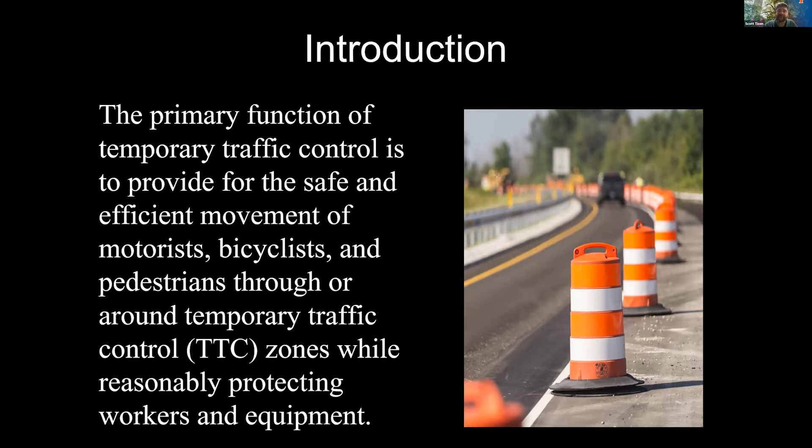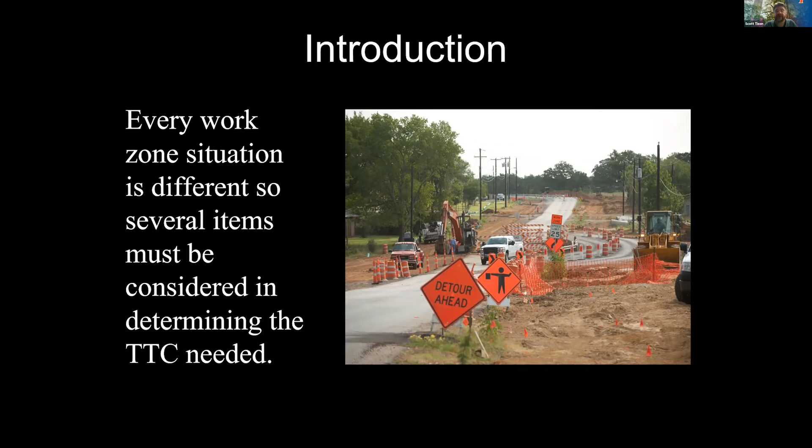I'm going to tell you right now, we don't have time to cover every possible thing. Although the Kentucky LTAP does a wonderful job in work zone training, they can certainly give you much more than I can in the next 45 to 50 minutes. But every work zone is going to be different. You're never going to have the same issue all the time. So there's different types of things that you need to be thinking about when you're putting together your work zone traffic control plan. For example, is this going to be a long-term project?

Are we going to be stationary? In other words, are we going to be sitting in one place? The definition that we use in Kentucky is work that occupies a location more than 3 days - that's considered to be long-term. Is it going to take that long? Is it going to be less?

For example, could it be an intermediate term stationary operation? That means work occupies a location for more than 1 daylight period, but up to and no more than 3 days. Or maybe it's nighttime work and it lasts more than 1 hour. That is considered to be intermediate in terms of our time duration for our work.

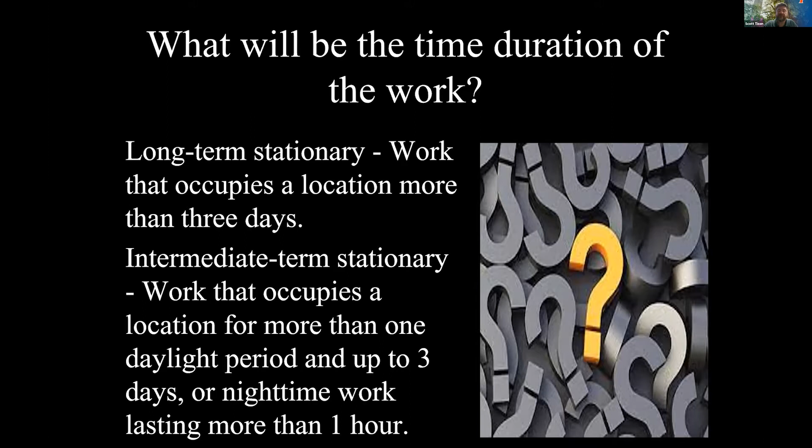Maybe the project is pretty quick - it's a short-term duration, daytime work. It occupies a location for more than 1 hour within a single daylight period. We'll be done by the end of the day. That could be a project that we may have to do, and there may be additional considerations for that.

Or short duration - in other words, we're not going to be out there super long at all. Maybe we're just throwing some rock down, maybe we're just patching potholes, but it's going to be work that occupies a specific location for no more than 1 hour at a time.

We may also have mobile operations where we're intermittently moving - we're stopping every once in a while, but not for a long period of time, and then continuing on. Or it may be a mobile operation where we're constantly moving. So all of these questions are factored into what kind of work is it we're going to do and what are our challenges.

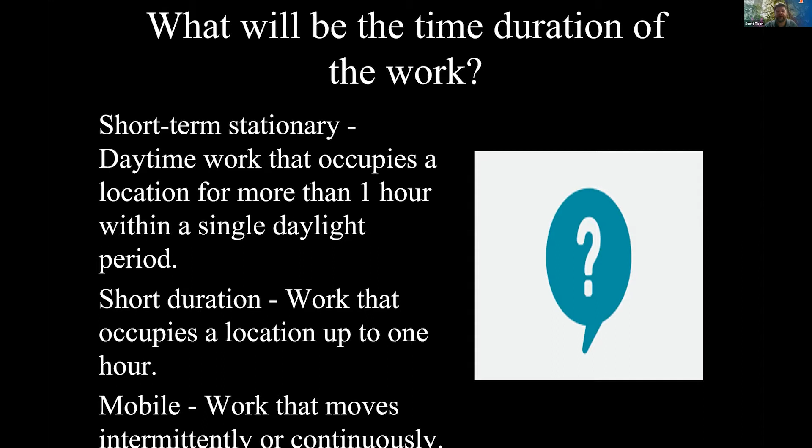For example, where are we working? Where's the work zone going to be? Is it on the road? Is it on the shoulder?

Is it off the roadway? Are we talking about working for sidewalk facilities? Are we going to have to channel those pedestrians and bicyclists to a different area? Is a detour going to be involved? Are we working near an intersection?

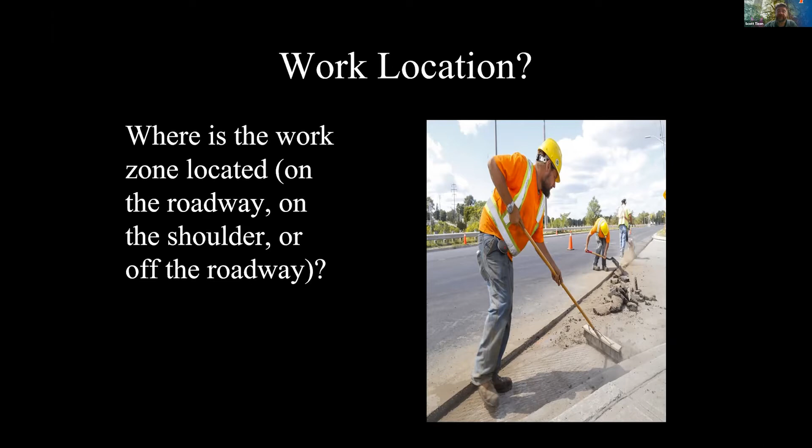All of those are important questions we have to ask ourselves when we're laying out how our work zone is going to be prepared. Other things I want you to think about: what kind of road are we really talking about? Is it a city street? Is it a high volume road? Maybe it's a rural road, low volume, no more than a couple cars every 5 minutes.

There's not a lot of vehicles out there. Maybe some farming equipment every once in a while. That may affect how we do our setup. The other question I would ask is, how fast is the traffic actually going? You all can feel free to place this in chat, but if you're in an area that has a 45-mile-an-hour roadway, what are people really driving on those roads? It's a 45-mile-an-hour road. What are they really driving where you live and where you work?

But it's a critical component. How fast is traffic really going? Do we know? Do we have any information? Have we done our research?

I know that we have some chats coming in here. If it's 45, people are saying it could be 55 to 60, 55. Seems to be a pretty consistent answer. So we know that our motorists, unfortunately, are probably driving faster than the speed limit that's posted. And so we take that into account as well.

And then we have to ask ourselves, how much traffic are we dealing with? For example, what time of day is it? Is it in the morning time when there's either the school rush or people trying to get to work? It's going to be a heavily trafficked area, and that's going to put a lot of pressure on us. It's going to cause a lot of hurt feelings on the part of the motorists.

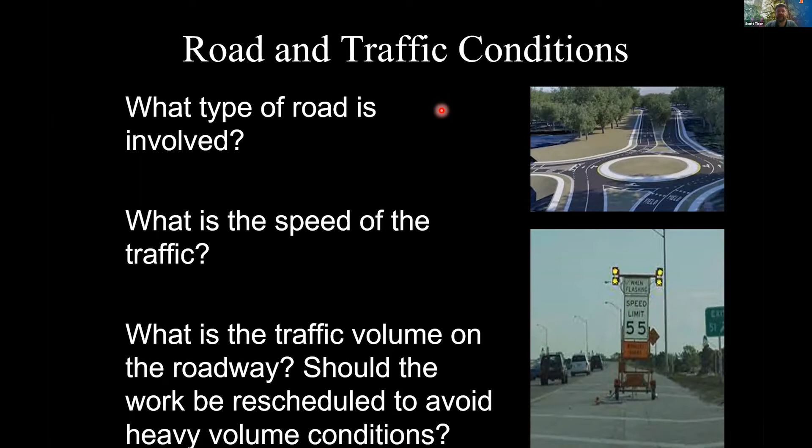Is there a home football game in our city that's got a lot of people coming in from out of town? We can't be tying up the roads that way. So all of those are road and traffic conditions that I want you to consider when you're planning out your work zone.

How about this? Will the nature of the traffic change once the work is underway? Will it affect our work? If it does, then we need to take that into consideration beforehand.

Do you have a good relationship with your law enforcement, your local law enforcement agency? If so, that's wonderful, and this is really going to be helpful to you. Will local law enforcement be notified? Perhaps we need their assistance in slowing people down. A little blue light never hurt anyone. A little slowing people down, that's not a bad thing.

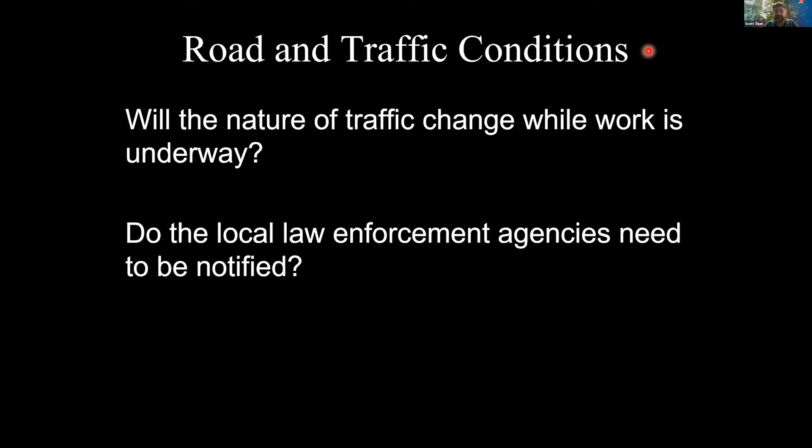That's a good thing. But what about emergency workers, emergency responders? If we're going to be taking up roads, do they need to know ahead of time? I think they do. Perhaps they can reroute themselves a little bit. We don't want emergency vehicles coming through while we're in the middle of a flagging operation, where we've stopped everybody on each side. We need to let those emergency crews work their way through. So we need to be sensitive and concerned about the needs of law enforcement and emergency personnel in what we do.

Now, just to give you an idea of what we're talking about in terms of temporary traffic control signage, we need to determine what kind of signs are going to be required. We'll look at that as we go through it here this morning, but you want to ask yourself: is this a flagging operation? Are we losing a lane? Are we merging people, or just shifting people around? Is it a shoulder that we're working on?

Depending on the kind of work we're doing is going to determine the type of sign and the sequence that we have to have. Some sequences only have a couple of signs. Some sequences have many more.

So we need to determine what sign we need by the kind of operation it is. And then the next question is, what are you actually going to put out there? Once you see the signs and you know there's something coming, what are we going to do to channel the motor public? We'll hear the term used: channelization, channelizing devices. What that simply means is we've got to point and direct the motoring public, the pedestrian public, or the bicycling public where it is we want them to go.

We want to delineate that. And the best way to do that is to point them, to show them, to make it simple on them so they don't have to worry and be confused about what we're trying to tell them. So you would ask yourself this question: which of these devices works best for our road users in the area that we work and we live?

Would it be cones? Maybe drums. Maybe they're a larger target. They give a good value - in other words, people see those things and they really don't want to run into them. They look very formidable. Now, in reality, these things break away. They snap there at the bottom.

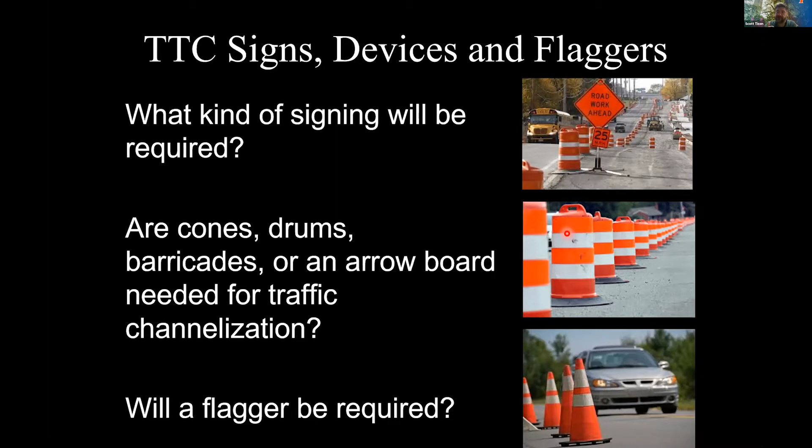And then lastly here on the slide, do we need a flagger? Is it a two-lane, two-way road? Is it a flagging operation? If so, we need to have flaggers on both ends. We need flaggers that are trained, certified, qualified to do the work. They've gone through the course, they have a certification card. If they are required, that's going to change some of the signs that we're going to use. It's going to change how we lay out our tapers, which we're going to talk about here in just a little bit. So some of the questions that I want you to consider as we're going through this presentation.

Now, we're going to go through the 4 parts of a work zone because there are 4 parts to a work zone. And the first area that you come to is the advanced warning area, and it does exactly what it sounds like. It gives advanced warning to the motoring public that something very soon is going to be encountered by them. It's something they're probably not expecting and something they're not used to. And so we calculate the advanced warning area from the very first sign that you will come to, to the beginning of that transition area, or what we would call the taper.

That's going to tell us what is our distance for the advanced warning signs. How far apart should those signs be? Well, we have a chart that we're going to give you here in just a few minutes. But you're going to start out very simple and very basic - for example, road work ahead, very generic, very simple. Could be utility work if you're doing a utility project.

The important part is that you are giving motorists enough time to recognize there is an issue. Now, let's use a 3-sign sequence for a moment. I realize every setup doesn't have only 3 signs, some more, some less, but let's talk about a 3-sign sequence.

That first sign in the advanced warning area is really, I won't yell at you, but it's as if that first sign is yelling, hey, wake up, pay attention, we're out here. That's what that first sign does. It lets people know something's fixing to happen, something different that I'm not used to.

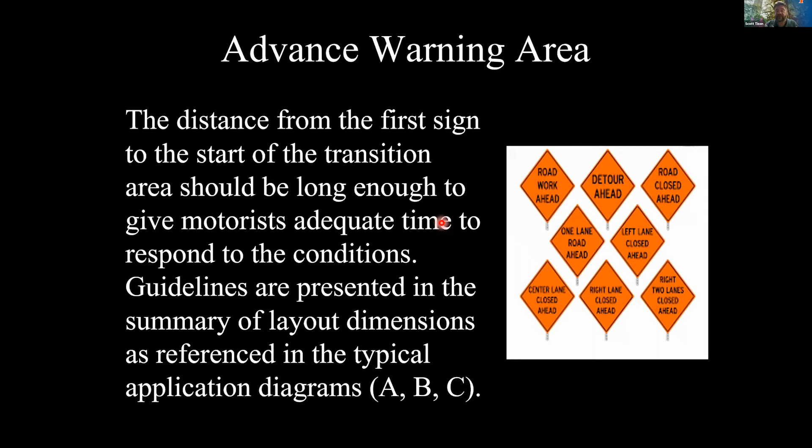It serves as the initial warning that something is taking place on this roadway that is out of the normal realm of experience. And remember, we're always dealing with the sum of drivers' experiences.

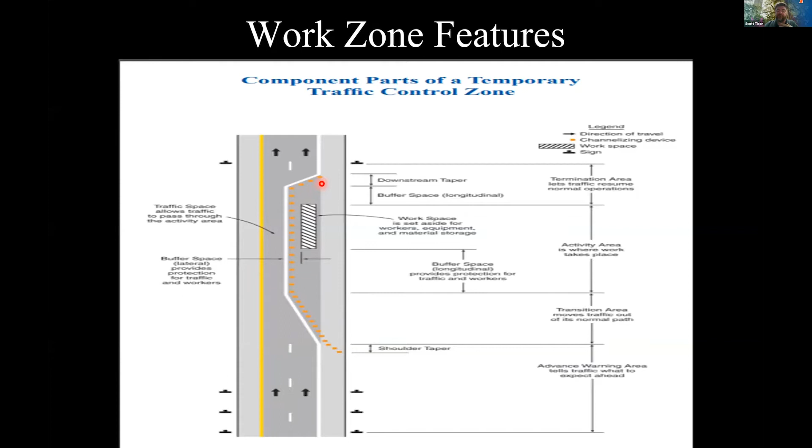In terms of a work area, there are 4 parts to it. You have your advanced warning area, used by these 3 little symbols, just showing 3 signs, could be more, could be less, but that's our advanced warning area. We'll talk about our transition area, which is this taper area right here. We have our activity area, which encompasses the buffer space, the workspace, and the traffic space. Then we have what's called the termination area, where we have a downstream taper where people are alerted it's okay to go ahead and get back into your lane.

Now, let's talk about some of the signs you're liable to see out in the field. Some of these are work zone signs, some are signs that are already there. For example, it's not uncommon to see a yellow or amber colored sign. That color is specifically a warning. It lets you know, under normal circumstances, that there is a condition located at that roadway that is constantly in place. For example, we have a lane merging here into this lane. That's not going to change unless we shut down that lane or take it away. This sign is going to be there in perpetuity until we change the design of the road.

So that's a sign that even if we had a work zone set up, it would probably stay there. Here we have a stop condition up ahead. It is a warning that there is a stop condition, it doesn't impose legal liability on us. It just tells us you're going to get to a spot where legal liability can be imposed. That's what a warning sign does.

We have regulatory signs. Now, they're not all this shape and not all this color, but the majority of them are going to have a white background with black lettering on them. These are the signs that get us in trouble as road users, the ones that impose legal liability on us. For example, if I don't stop for pedestrians in a crosswalk, I have opened myself up to a civil penalty. I can be cited.

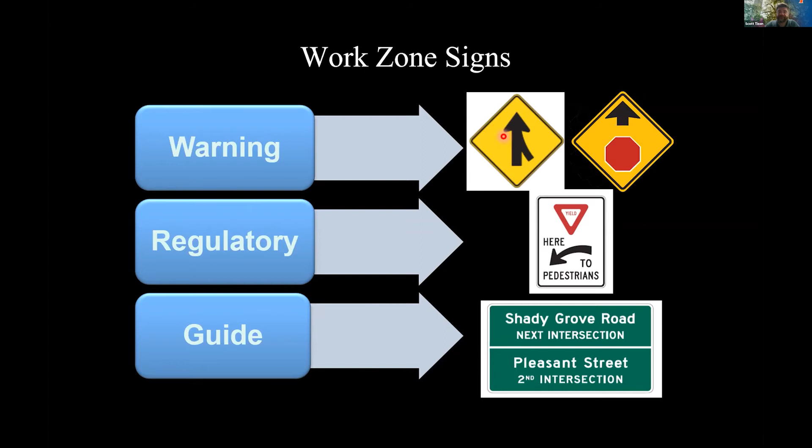For our work zone signs, we want to be careful that we use the correct sign supports, ones that are breakaway — we call them crash worthy. They have to yield when they're hit. They're going to damage our vehicles, but it should not cause a fatality for the motorist who impacts them. For example, you have a U-channel post driven into the ground right here. It's going to break away, snapping at the base just above ground level. It's going to give when it gets hit. It's meant to break away. It's built to handle that.

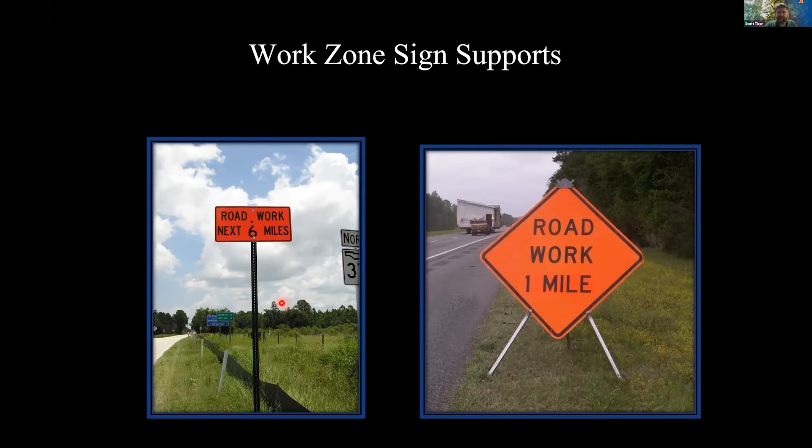Or we may have sign supports that are for long-term work. Typically these are for longer period jobs where we're going to be out there weeks on end. For our more temporary jobs, we just put them on different types of sign supports because we're not going to be out there as long. We don't need a more permanent sign for the time that we're out there.

And for some of you, you may never have seen anything like this, and that's really good — I'm very happy to hear that. But one of the challenges we face, whether you're with Public Works, with the state or local agency, or a contractor, is figuring out where to put these signs on some of the roadways we have to deal with. I want to go ahead and read some responses here as they come.

We have one individual, Eamon, and we said this creates a really big problem for ADA access. I'm really glad you brought that up because that's exactly where we were going to go. Jason says it happens all the time, obstruction of the pedestrian access route. That's a really great point.

So let's talk about ADA for a minute because it absolutely affects what we do in the work zone. Everything we put out there, our signs, or if we're shutting down a sidewalk, we have to make sure we are ADA compliant. That stands for the Americans with Disabilities Act. It was signed into law by President Bush in the early 90s, and then just kind of sat on the shelf. Around 2011, 2012, President Obama reauthorized the Americans with Disabilities Act and ordered the Justice Department to enforce it, and they've been enforcing it ever since.

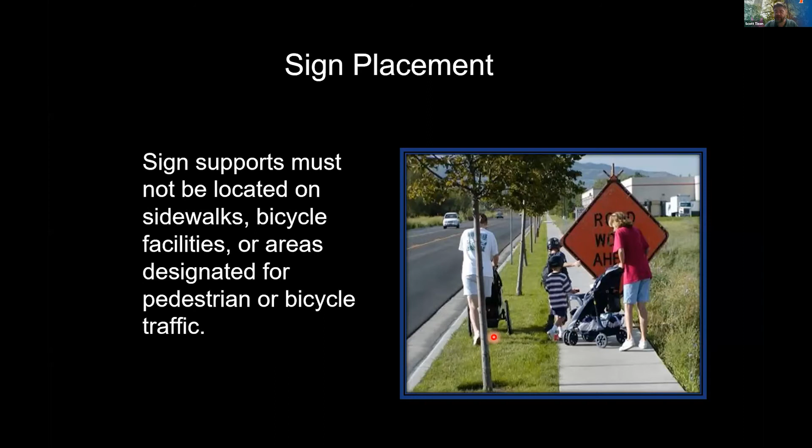Now that's if it's straight and flat, with no obstructions around it. Portable changeable message signs are usually able to be read and understood at about a half a mile, that's typically where those will be found.

We mentioned guide signs just a little bit earlier, but there's some additional stuff I want to share with you on that. They are rectangular. Obviously, they are green, and that is by design from the MUTCD. It's got the green background with white lettering on it.

But there may be some other guide signs that actually show up in our work zone, but they're not green because it's a temporary traffic control situation. We're going to have an orange background with black letters on it. It's still going to give guidance to our motorists. For example, here's one: road construction, that's 13 miles.

That's giving us guidance. But I'm thinking, is there another type of guidance sign that we put in our work zone? It's not going to be diamond shaped, it's going to be rectangular as well. Anybody have any idea what sign that might be? Typically it occurs near or at the end.

Yep, you're absolutely right, end construction or end road work. That would be in what we call our termination area, where the work zone is ending and motorists are free to get back into their travel lane. So those could be considered guidance signs. They're letting us know, okay, you're now away from where all the pressure is. Go on with your life, go have a great rest of your day.

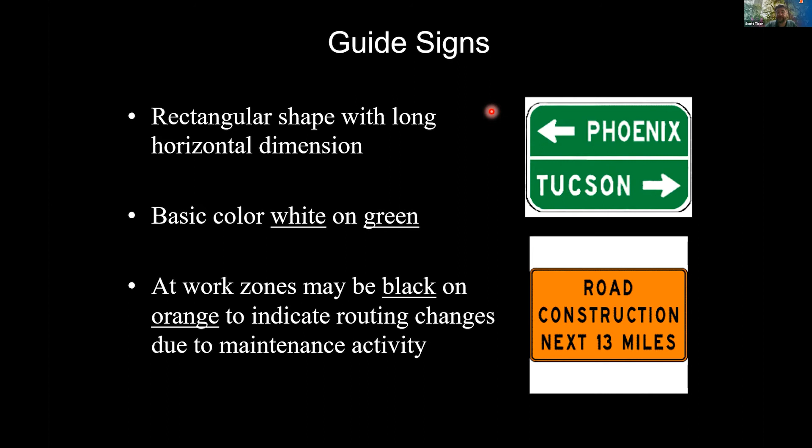One of the other things we talked about earlier were regulatory signs. I want to do a little bit more here. I said generally they're going to be rectangular, white background, black letters. That's true, but I just want to remind you, these are where our legal liability comes in. It could be a do not pass, could be right turn only, or right lane must turn right. Those are regulatory signs, but they're not the only kind.

And we know this one, and we've known it since we were kids - that's the stop sign. But I will tell you this: traffic control has come a long way, because for years the stop sign was not red. Does anybody want to take a guess what our stop sign colors used to be in the United States? What color background, what color lettering? Because it was not red.

R. Williams coming strong said, 'Oh, it's yellow.' You're 100% correct, the stop sign used to be yellow. And the reason it was yellow is because it was a warning. It's as if you were saying: warning, there is a stop condition up ahead. Well, that doesn't have any teeth to it. Oh, warning, there's a train track up ahead - that's good, but it doesn't really have teeth to it. And so what began to occur to transportation officials around the country is nobody's stopping for our yellow signs. Maybe we need to pick a different color.

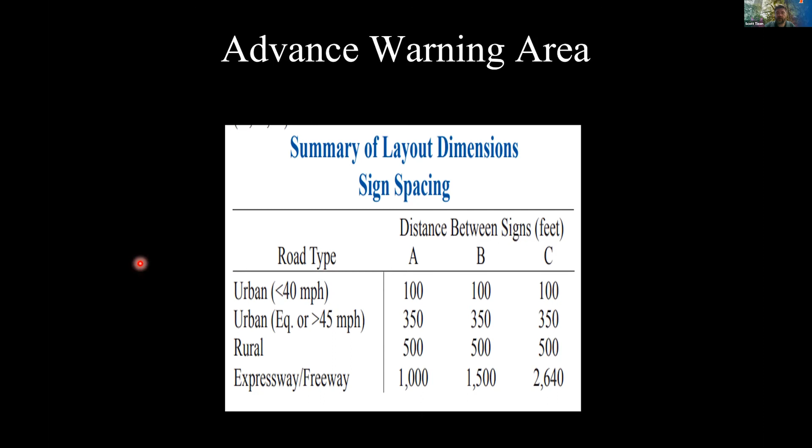All right, we talked about signs.

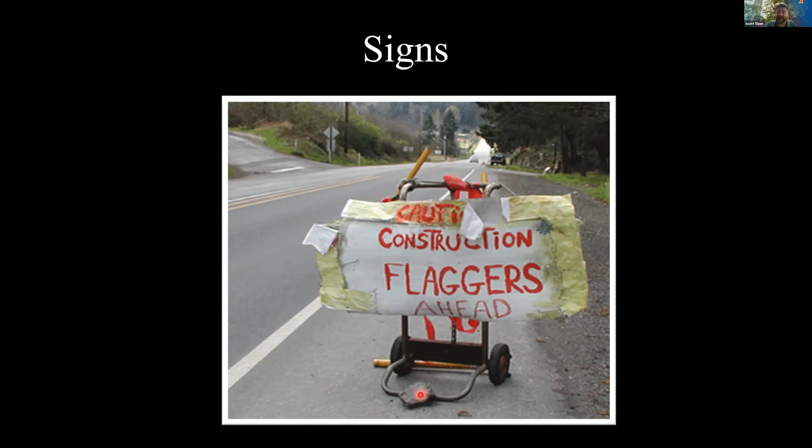This is not good—I guess we should give them credit, they did ballast the hand cart with a chunk of concrete, so that's a thumbs up for that. But in all seriousness, this is not appropriate for signs in the work zone. We want to make sure we have the correct signs out there. We want to command the motoring public's attention, but also have their respect, and no one's going to respect anything like this.

All right, so we've gone from the advance warning area where we have our signs to now the transition area where we have our taper. That's an angle of cones, drums, or channelizing devices that transitions me from my normal traffic pattern to another area. We don't have a ton of time to develop this morning, but how do I know how long my taper is supposed to be? I'll just go out there, put down some cones, and guesstimate it—actually, we're looking for more than that.

Now there's a table here that's going to help us in terms of our lane width and the speed. That's really, really helpful. For example, if you're on a 45-mile-an-hour roadway and it's a 12-foot lane, that taper should be 540 feet long. That's a lot of cones, but that's what's required of us on a 12-foot lane. So that means you're going to space from one cone to the next about 45 feet apart.

Now, some of you might be thinking, gosh, 45 feet apart seems like an awful lot. What is that Olympic sport, Miss Brittany—is it slalom? That's when they come down the mountain going around things. You might say motorists might be tempted to do that with our channelizing devices. Well, that's the maximum you can space them—you could pull them in tighter if you wanted to, that's perfectly okay.

So we have this table here that really outlines it very simply—just go to the table and calculate from there. If you want to do it the longhand way, and there are times we do that, if you're on a roadway that's 40 miles an hour or less, you take the width of the road, say 12 feet, times the speed of the road, which in this case is 40.

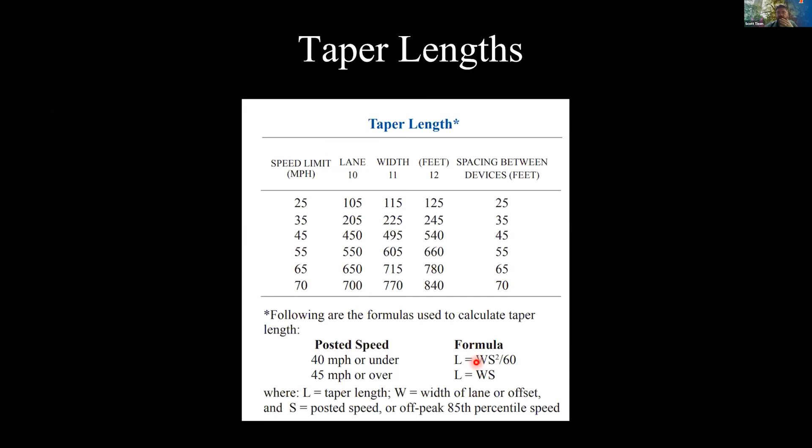So for a merging taper on a 12-foot lane, this is going to tell us how long our tapers need to be. And we said, go back one up here, remember we did this math right here? Okay, we could do that here, and I'll show you why it would help to know that.

So a merging taper is what's called a full L. That means we did that math calculation. We got the whole distance.

When we get to a shifting taper, that's a different number, because remember, a shift means, let's say you've got 3 lanes going one direction. In a shifting taper, no one's losing a lane. I'm just moving your travel lane into a different area than you're used to driving.

We put out our channelizing devices. We still have our 3 lanes, we just shifted them a little bit. Well, I don't need to put out hundreds and hundreds of feet of channelizing devices like I do for a merge, if all I'm telling the motorist is stay in your lane. We've channelized it off, so we kind of corralled you. Just go where we tell you to go.

For a shifting taper, that's only half an L. So when you figure out what the full L is, just cut that in half. And that's going to tell you what these are going to be. That's what they tell you.

For a 45-mile-an-hour road, for a merge, it's 540 feet. It's that big one. But for a shift, it doesn't need to be hundreds of feet, it only needs to be half of that L. So we just cut the 540 in half to 270. All right, that makes good sense.

But then there's a shoulder closure taper out here. How do we deal with that? What do we do? Well, it's a math problem as well. For example, you are going to take the speed limit and multiply it by however wide that shoulder taper is going to be.

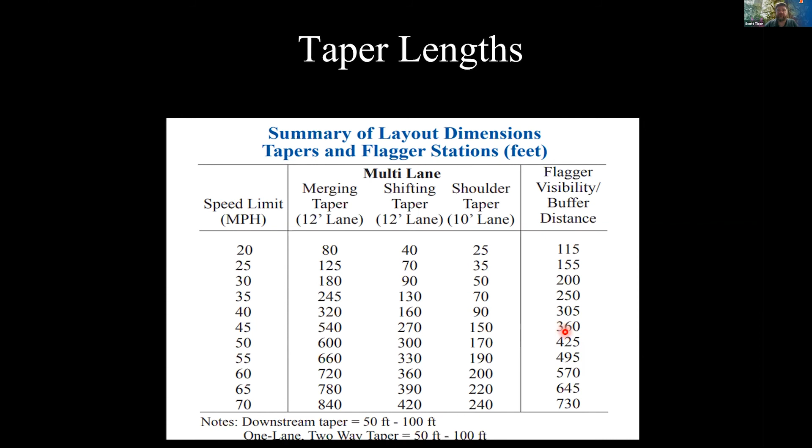That's going to tell us how long that shoulder taper needs to be. For a buffer distance, and this is more for flagging but also applies here, your buffer distance is based on the speed of the road, and we have a table for that. On that 45-mile-an-hour road, the buffer is an extra 360 feet just on the other side of the taper. So we did merging tapers, the shift, and the shoulder.

Here's one I want you to know: it can be called a 1-lane, 2-way traffic taper. Some states call it a 2-lane, 2-way traffic taper. It's the same thing, a flagging operation. That means you've got a flagger on each end, using one single common lane for both sides of traffic. You have to alternate when they're coming.

Remember how we just did that calculation, or looked at the table, and these are some big numbers? Let's say it's a 45-mile-an-hour roadway we're flagging on. The temptation is to go to the table and say, 45 miles an hour, that's a taper, 540 feet. But you don't want a flagging taper that long, because if people come up to it, they'll just keep following the channelizing devices and go right around the flagger. But it's so long, that's what they're used to doing. So a flagging operation is different.

It's going to be 50 to 100 feet, that's all you get for a taper. You don't calculate anything, the calculation's been done for you. The reason is, when you're coming down the road, we want you to see a wall of cones. It makes you not just slow down, it makes you come to a complete stop. That's a shock to the system for the motorist. But once you stop, hopefully that gives the flagger an opportunity to control and direct traffic.

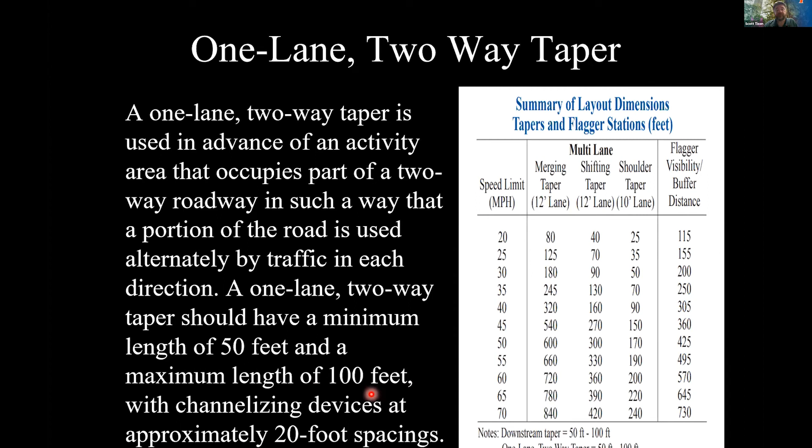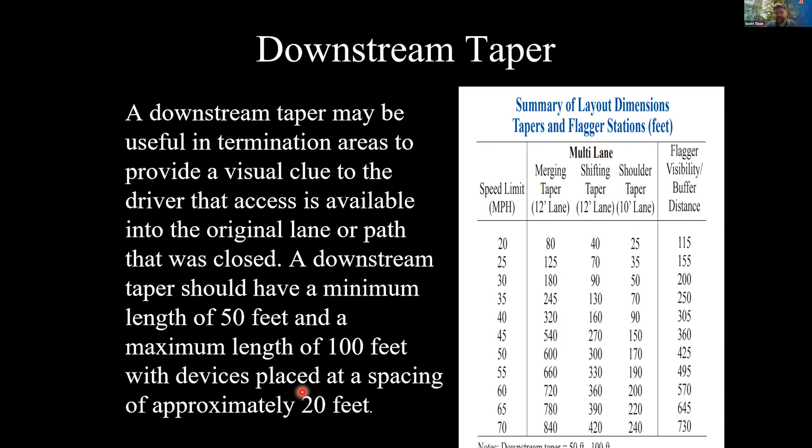On the far end, on the downstream taper, that also will be 50 to 100 feet, mirroring the flagging taper as you go through. Minimum 50 feet, maximum 100 feet. You're going to space your devices approximately 20 feet apart for both tapers. You can make them shorter if you want, but it's going to be in about the 20-foot range, maybe a bit smaller. Five cones on a 50-foot taper, about 10 to 20 feet apart, depending.

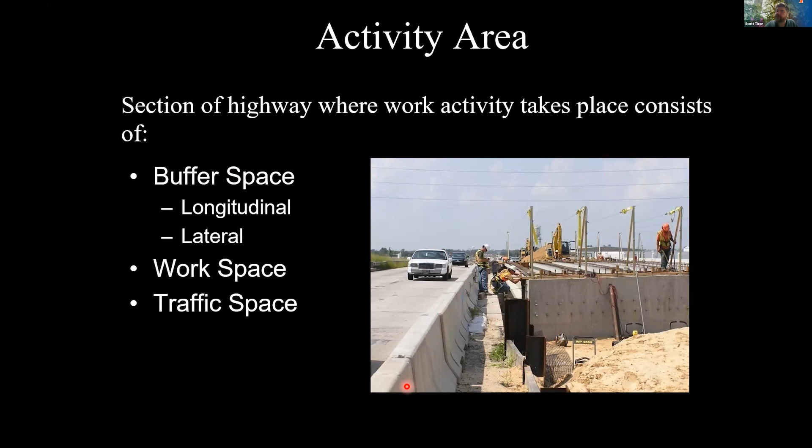So we've done the advanced warning area and the transition area. Now let's get to the activity area where the stuff's really happening. There's a couple parts to the activity area: the buffer space, the workspace, and the traffic space. The buffer space has two different kinds: there's a longitudinal, which is a straight line, and there's the lateral, the side to side.

Oh, I see what you're doing. Okay, hopefully now you're seeing the red. Yes, the red dot. Yes. Okay, we can, yes ma'am.

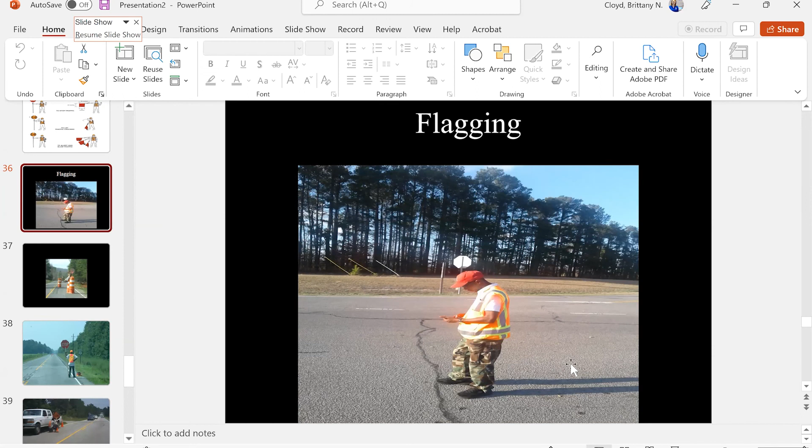Take a look at this fella who is, quote unquote, flagging. He's there playing on his phone, not paying a lick of attention to me. When I had to ask him a question, that's what I saw him doing. Y'all, that's not safe. This is supposed to be work zone safety awareness, and this is the antithesis of that. This is not what we want from our people. Don't be standing out in the middle of the road playing on your phone. Put the phone aside, you need to be focused on what you're doing.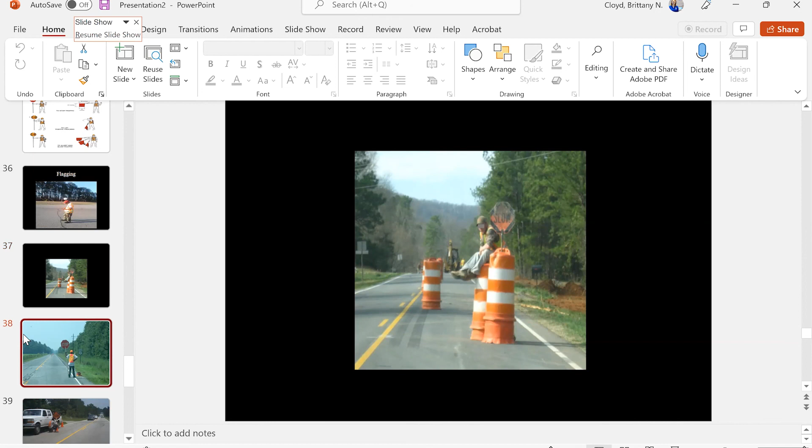This is a layup. I don't know what fans we have on the call today, but if you're a UK fan or Louisville or somebody else, they tell you to keep your head on a swivel when you're playing football. So he's got his back turned to us. That's a real problem. He needs to turn around and face oncoming traffic. But every once in a while, it'd be good if he'd peek over his shoulder and just see where that traffic's coming from the other end.

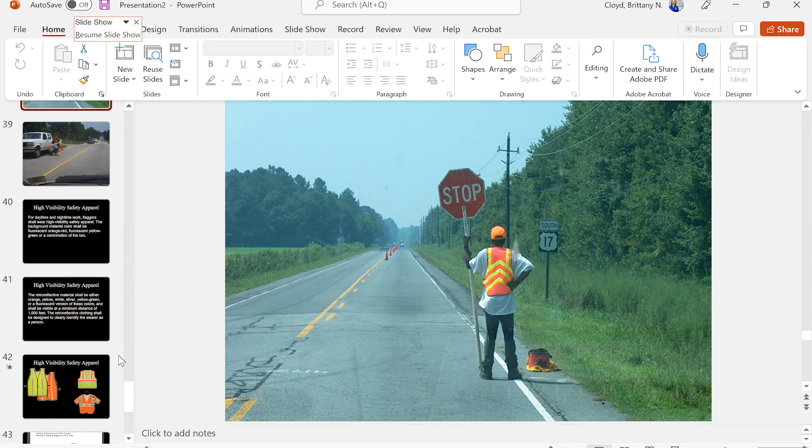All right, there's one more picture I want to show, if you would. And I want to give about 30 seconds or so to everybody to chat in on what you see as a problem. We'll play a little game here as we're winding down. What is the issue here? Or what are the issues, I should say, plural?

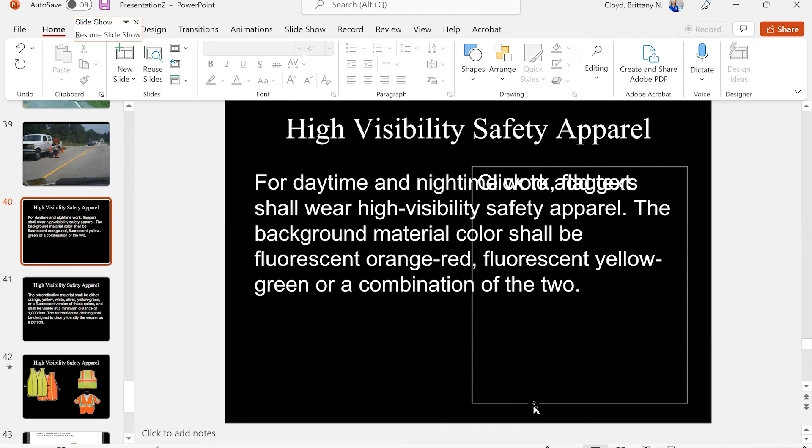For high vis apparel, it's got to be orange, red, or yellow, green, or some combination of that for it to be usable. And that's for daytime and nighttime operations. You are required to wear something that can be seen at 1,000 feet. That is a mandate from MUTCD, but that's also a mandate from the state of Kentucky as well. And other states, for the most part, have accepted that decision as well.

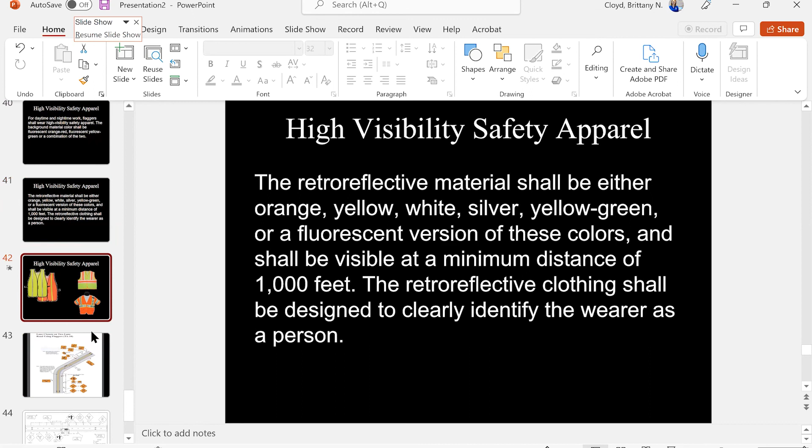This is just on the next slide, if you would. Go to the one where they have the actual three kinds of vests. Type 1 vests are on the left. If you would just, there you go. Type 1s are on the left. They're not appropriate to be used in a right of way. Type 2 are on the right, at the top, type 3 at the bottom. So basically type 3 has sleeves.

The rule says the only way we know what type they are, even though we can look at them and tell, is you've got to be able to read the label in the back, which was a problem for me when I started doing this years ago because I'd rip the tag out of the back of my neck because it itched my neck so bad when I was out working. Well, nobody told me, but that makes it an illegal vest. So be mindful that it's not just being able to identify what it is by sight, but it's actually being able to read the label.

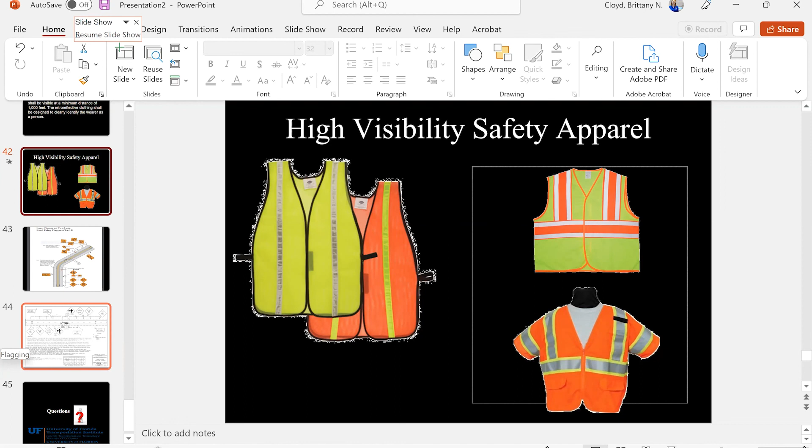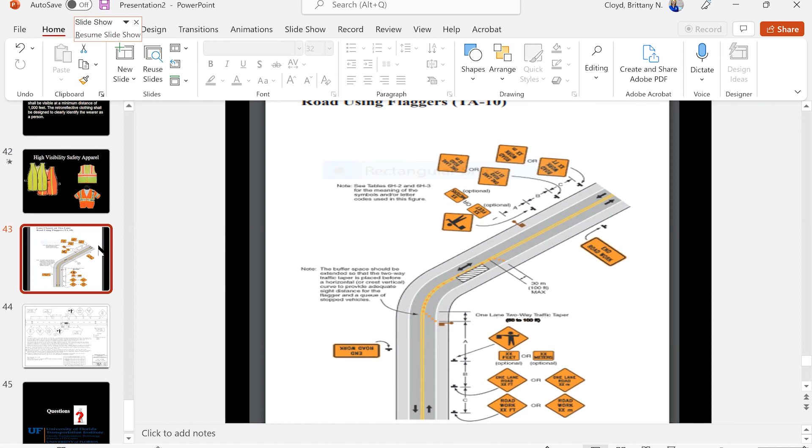The next slide shows a flagging operation. The road work ahead sign, the 1-lane road, and the flagger symbol sign kind of shows you a bit of a setup. I'm happy to share that with people as well. That comes from the Kentucky flagging manual.